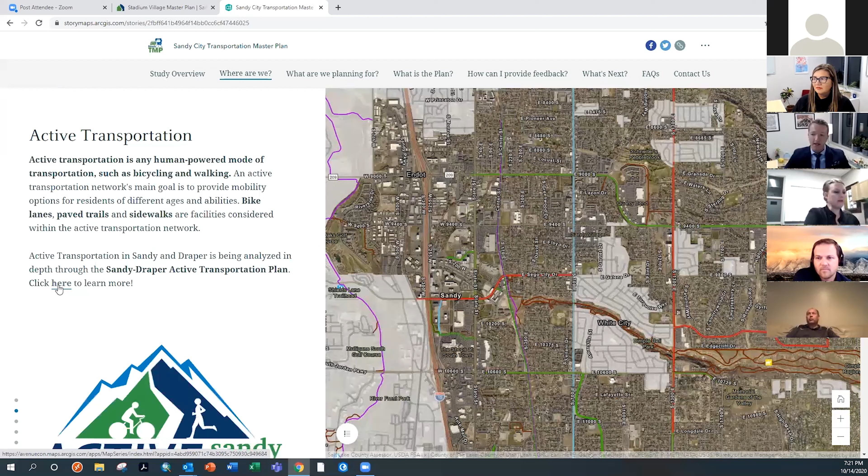Even though it's getting a deeper look, and you can find more information by clicking on this link that'll take you to the active transportation website, it certainly played a large role. Several of the projects you'll see here in a minute were active transportation projects, things like improving corridors to make sure we had bike lanes and the like.

However, there's not a great connection between the TRAX and the commuter rail, and that's something we wanted to look at. So transit and bus and train connections were something we certainly wanted to take a look at as part of the plan.

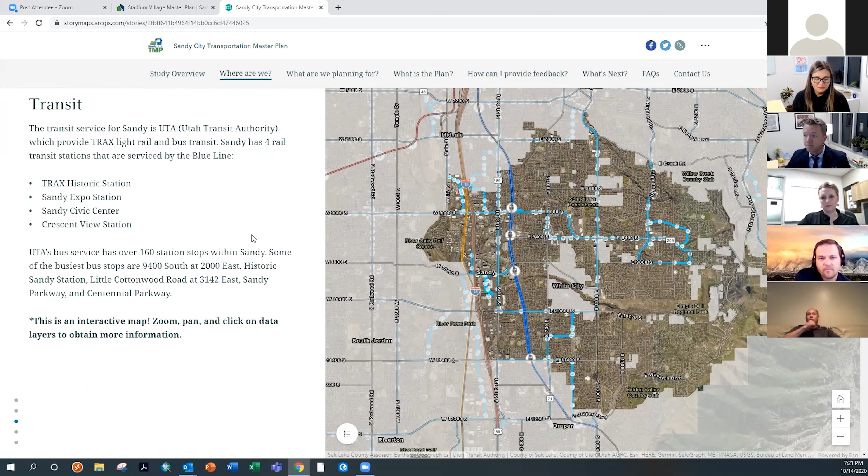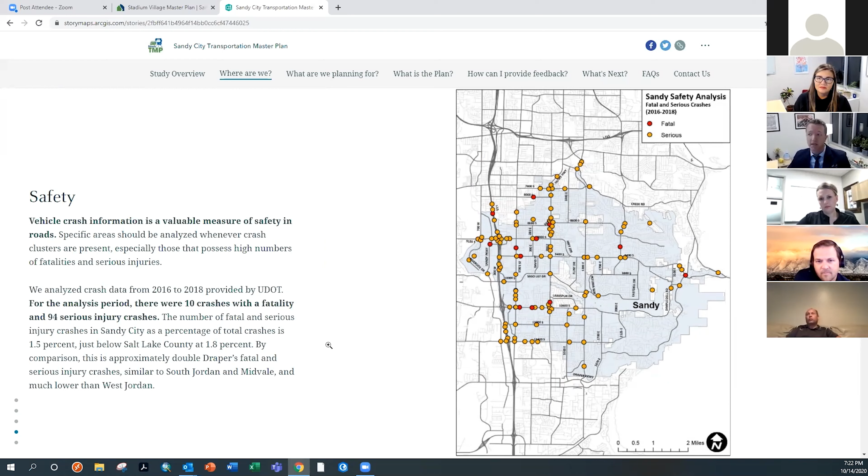The cluster of these crashes at intersections was something we paid special close attention to. You'll see in the final project list that several of these intersections, like 13th East and Creek Road, 90th and Sandy Parkway, 7th West, and 90th and Monroe, all have a cluster of crashes that we took a look at - those ones ultimately got projects on them.

However, going forward, there's going to be a lot of growth. And so a lot of the value of the master plan itself is to look at future growth and make sure that we're planning for those things, and that we can try to maintain the same level of service that we enjoy today. We're looking at Sandy City adding about 30,000, just under 30,000 more people in population over the next 30 years, and almost 30,000 jobs as well. So you can see population growth and job growth in Sandy City between now and 2050.

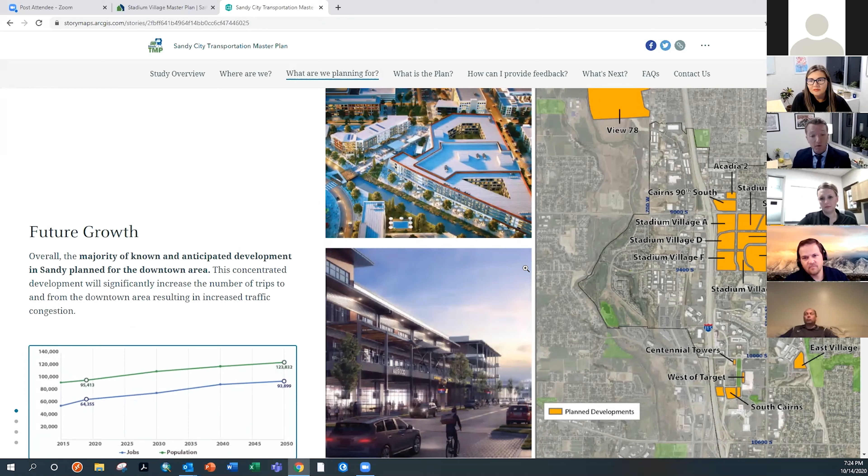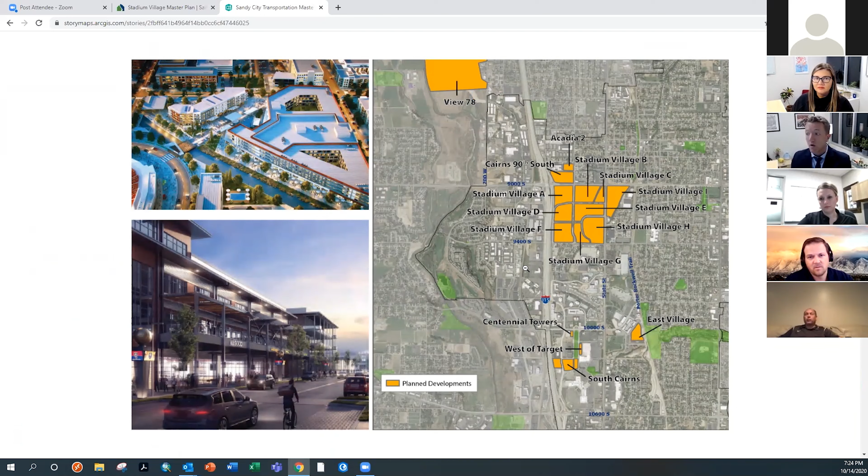A lot of this growth is in areas that have recently been doing master plans. The images here on the right are a map of the Stadium Village area, kind of around Rio Tinto Stadium and the area between the mall and 90th South. You can see a lot of different plans. The images on the left are renderings from the Stadium Village plan, where we're planning for more growth, some more density in that area. A lot of the new growth we're planning for is happening in those areas.

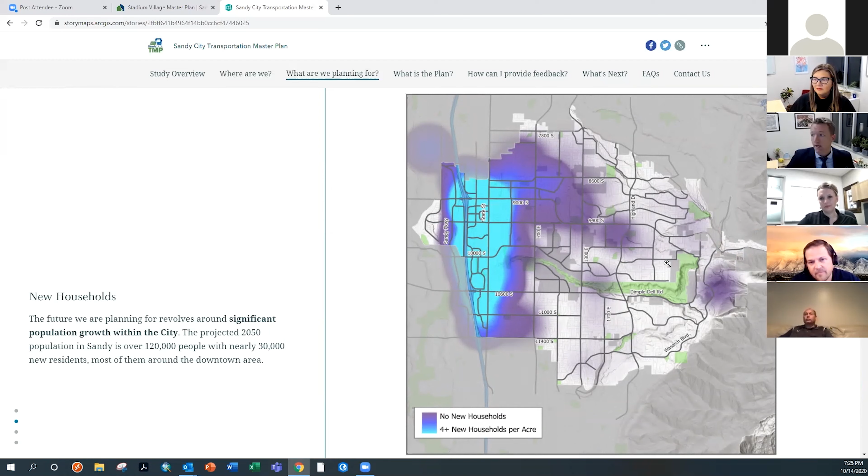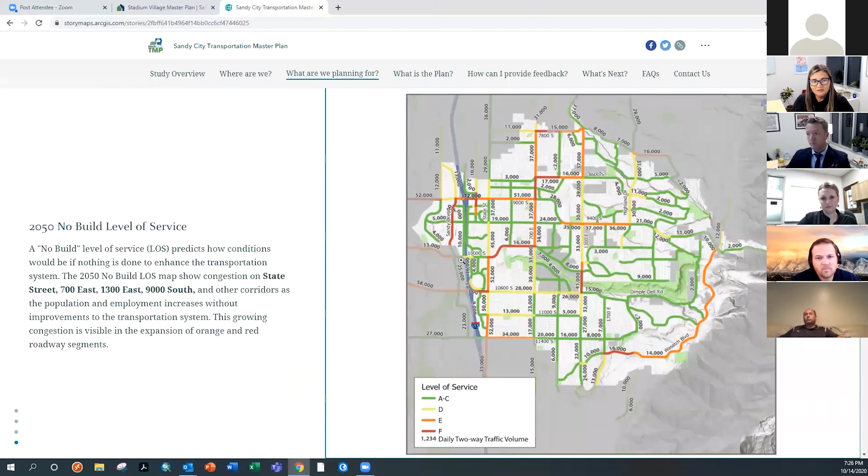But have no fear, we have a plan to have the improvements that we need to maintain the quality of life that we've enjoyed. That's where the question of what is the plan kind of comes in. So we've worked collectively with Sandy City, with Brittany, with Ryan, Dan, everybody, and the consultant team, looking at what improvements are necessary and need to be made to maintain that same level of green corridors within the city and the quality of life we've enjoyed.

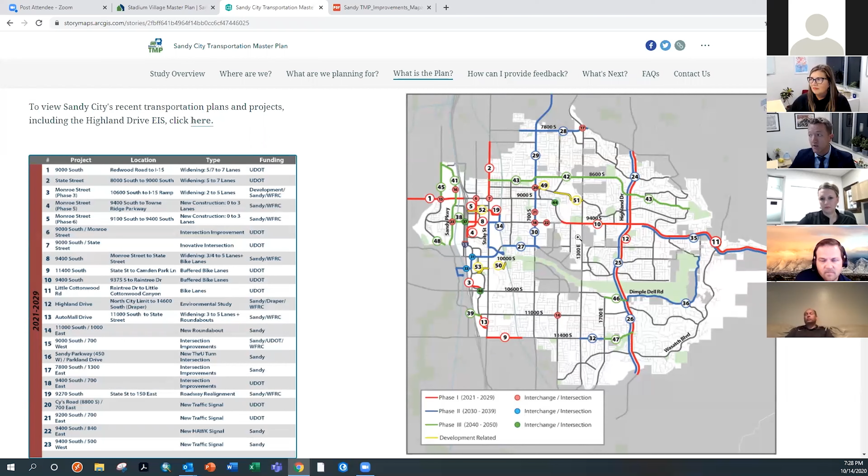And so we believe that by completing these projects or building out this project list as best we can, that Sandy City can stay ahead of the growth that's coming and maintain the quality of life that your residents have kind of always enjoyed. This plan, this map of the projects is really kind of the big takeaway. So if you asked me to show you the master plan in a single map or a single page, it would be this. And this is what we'd really like people to take a close look at and to comment on.

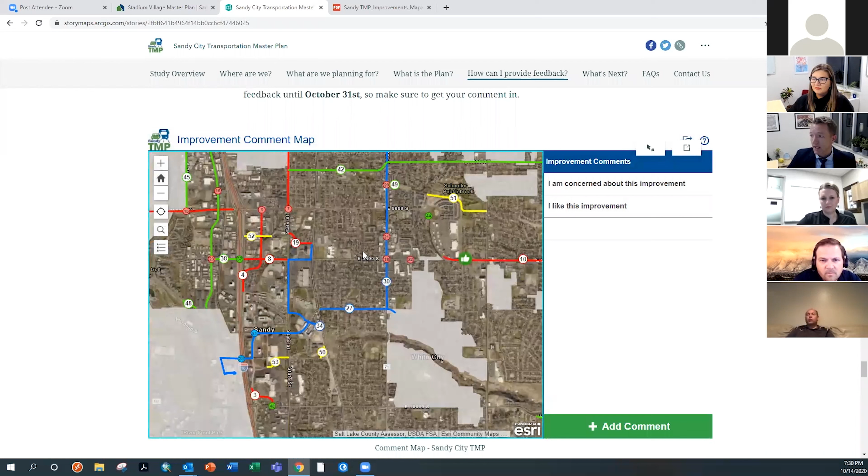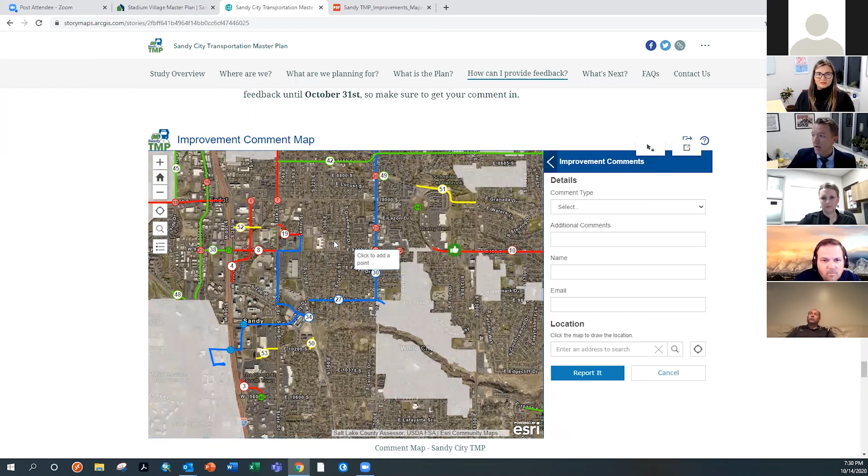And so to that end, we provided a way that you can provide feedback directly on that map. If you click on the 'how can I provide feedback,' we have an interactive map that you can comment on. There's a map description here that you can read about how to identify corridor projects, and you can zoom in and click on corridors and it'll tell you about them, like what is this project. And if you're ready to make a comment, you can just click on this green box and it'll pull up a comment box, and you can find the area you want to comment on, click on it once to drop a pin, select the comment type and add your comments appropriately.

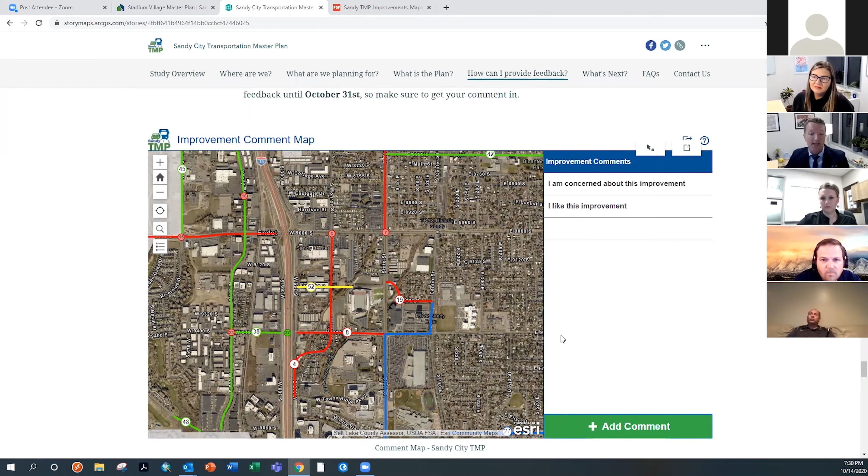The project list, ultimately, we want to reflect what the city would like to see in terms of roadway improvements. There's a handful of widenings. There's several intersections that are going to be key to take a look at. And so we want this plan to be yours. So please take the time to go to the map, to provide a comment, and to let us know what you think about the individual projects as we work towards finalizing the master plan.

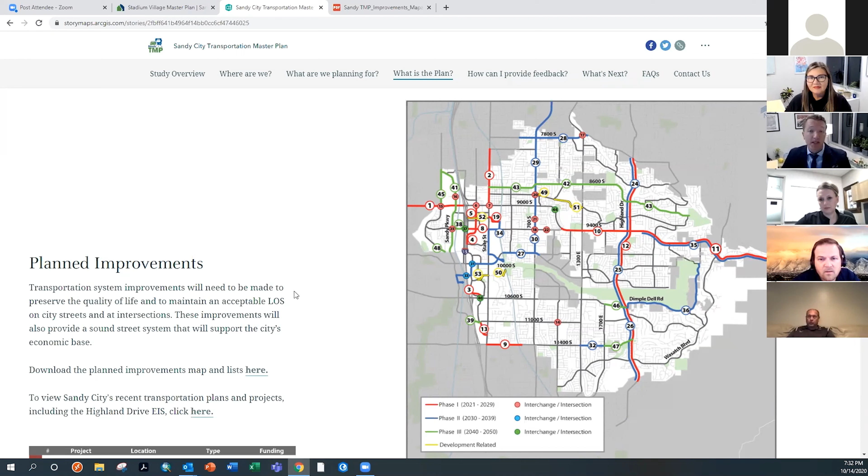The way we want to use comments is to specifically take a look at the projects. We want to know how people feel about them, and is there an opportunity for us to take a closer look at any one of these individual projects, including if people have a real concern about it. We want to understand what that concern is, and there might be an opportunity to have a project removed from the list. Ultimately, we want this to be your plan, and we want it to reflect your values, and we want it to serve Sandy City.

And we think that it does. We think that we are doing a good job to identify things that improve safety, make it safer for your community to navigate around, that accommodates all modes. We've got bike projects and transit projects on here, that it reduces congestion as well. But if we aren't accomplishing those things, or you have a real problem with one of those projects, let us know, and yeah, there could be an opportunity to have it removed.

I would add on to that too, Thomas, that if there's a lot of negative feedback about a project, it would be a definite signal to us that we need to look at the project from a different perspective. Are there some particular concerns about the project that we need to review? Is there something that we're not seeing or something that we're missing? Is there some adjustments that are needed with the project? So maybe the project's still needed, but maybe we need to take a little bit different approach to it.

Or if there was a project that was more positive, could it possibly move ahead in any of the phasing? Sure, yeah. If people really, really want to see a project done early, if there was a lot of passion behind getting a project done, then there's probably some value in taking a look at the timing.

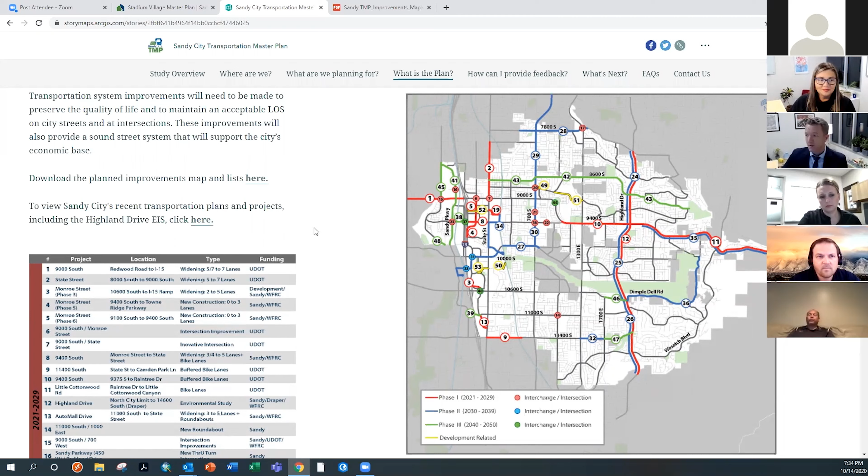Brittany talked about doing the active transportation plan and overlapping with the master plan. We've got today's public meeting, but going into the future, late this year or early next year, the plan is to have this document presented to Planning Commission and have their review and recommendation, and then ultimately to City Council, and then eventually adopted with the regional transportation plan, so that Wasatch Front, which controls all the transportation plans in the region, can add it to their RTP.

And each of those meetings are public forums, so people have the opportunity to attend Planning Commission and City Council and voice their concerns there if they feel like they need to or want to see how this particular document is advancing this plan.

But even beyond then, the project list goes to Brittany and Ryan and the city, and they get an opportunity to start taking a look at them from a capital improvements perspective and start to fund and see how things go. Several of these corridors will need further study. So even beyond into next year and beyond, there's opportunities to still follow projects.

Okay, there's been some chatter recently around the Highland Drive extension project. What is the plan for that? Brittany, do you want to talk about Highland Drive? Yeah, I'll hit on that.

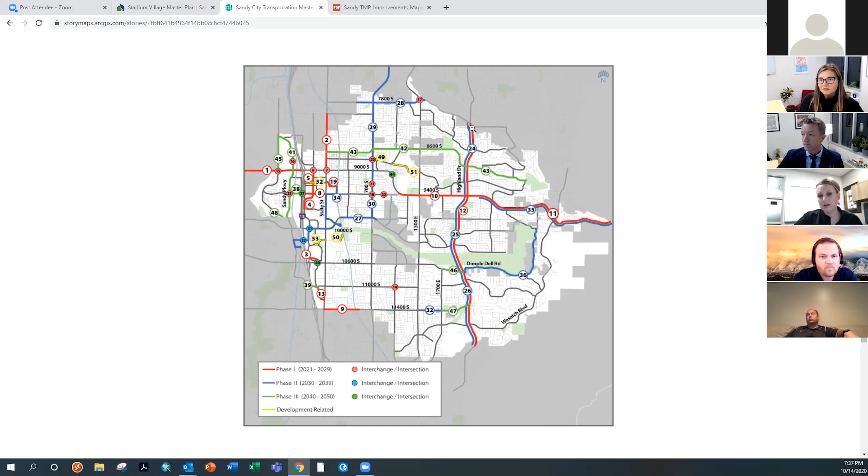So there's two major things that we as a city are looking for from this study. Number one, is the Highland Drive corridor needed or is it not needed? And number two, if it is needed, how are we supposed to get through Dimple Dell Park and how are we supposed to get through the Hidden Valley Golf Course?

We anticipate if it's not needed, we will still have construction there, particularly between Sego Lily and 9800 South, likely a 2-lane corridor with an adjacent trail.

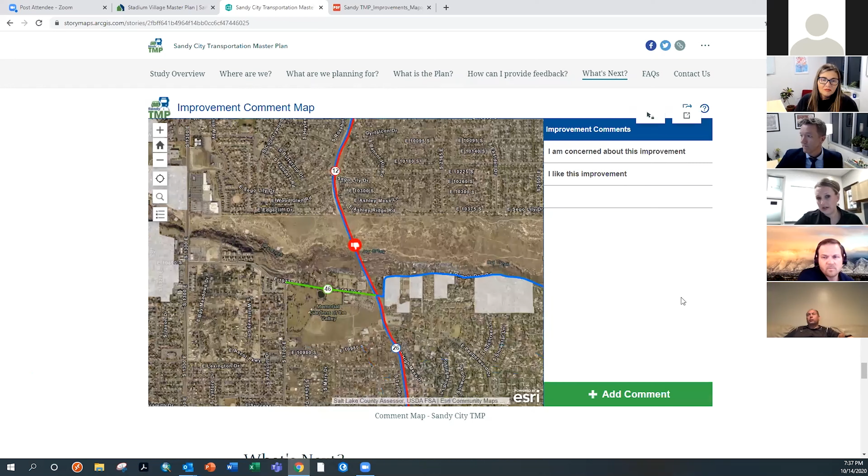And if it is needed, then it would be done likely in phases because it's quite a large project. But the soonest that any construction would happen would be at the year 2030 or later.

And that's because the whole study is pretty big, $4.3 million is a lot. So we anticipate that study to take about a year or two.

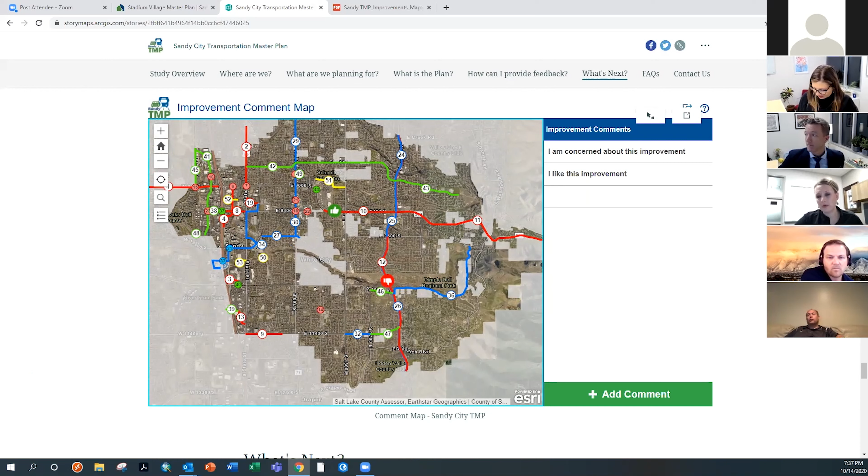And then it'll take some time for coordination between us and Draper on how we want to move forward with those project recommendations. And then from that, the federal funding cycles, which are the projects that require a lot of funding, that funding comes from the federal government, and we have to apply for those projects 5 years in advance.

And so we applied to get the funding for this study back in 2016. And so we would have to, after our coordination with Draper and our plans to move forward, we would then...

have to apply for that federal funding at 2025 at the soonest. So if whatever project we decide to apply for gets funded, the soonest it would happen is in year 2030.

But the big takeaway from everything I'm saying is what the study is going to do for us. One, it'll tell us, is a Highland Drive corridor needed or is it not needed? And then if it is needed, how do we get through the Dimple Dell and through Hidden Valley?

If I can, just to kind of clarify maybe the map a little bit for people who might be viewing it, you'll notice there's multiple numbers on Highland Drive, and that's because there's different phases. And Brittany just talked about that environmental study, and that is what's shown for Project 12 here. It's Highland Drive, it's the environmental study, it's the red line.

So in that first phase that Brittany just talked about, those first couple of years, it's just doing the environmental study. And then beyond that, going into the future, depending on what that study has as outcomes, you can see we've got 24, 25, and 26 are all Highland Drive. And the reason that we're listing it 3 times is because they have different limits.

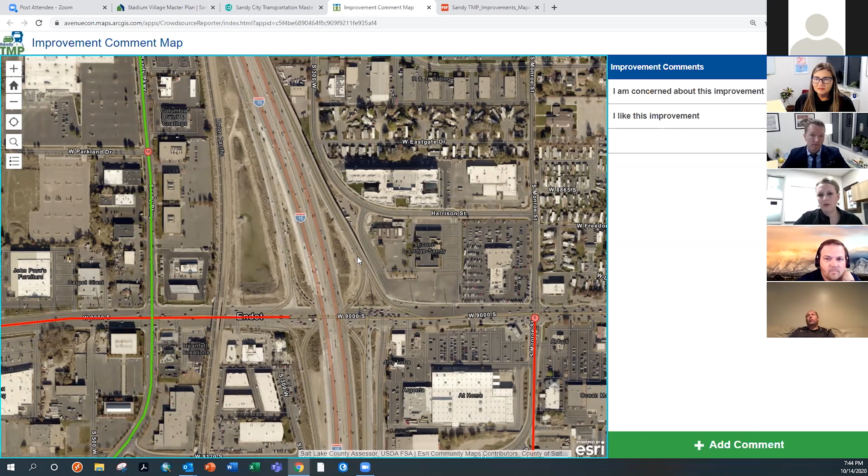As far as the northbound on-ramp goes, that is a pinch point in the area, and that interchange, as far as I understand it, is the busiest interchange in the whole state. So that northbound on-ramp does cause some backup to these side streets that approach the freeway. While this new flyover and new ramp UDOT's doing right now will not add any capacity to that ramp metering area, it'll be a new change, and new traffic patterns will develop through here because of that project.

And so that will continue to be studied over the next few years. Accommodations should be made in phase 2 of the I-15 northbound collector distributor project.

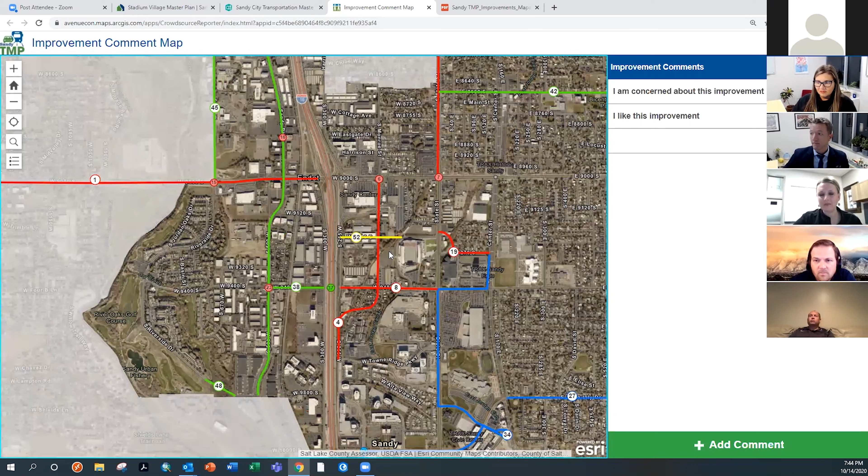Another project that we're doing right now, we actually just barely bid this out, so construction's just getting started, is at the Monroe and 90th South intersection. We intend to add dual left turn lanes on every single leg of this intersection, and then also a project on the south end, a little bit on the south leg down there.

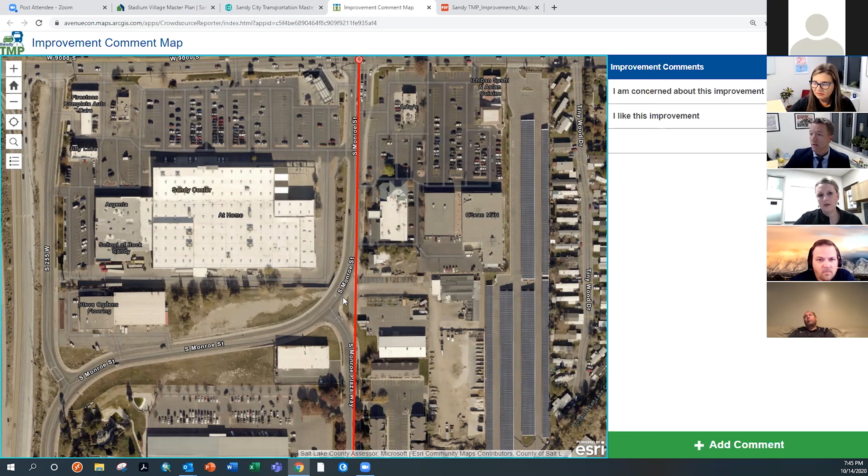Yep, on where Monroe Street and Monroe Parkway connect. But the main thing is adding capacity to the Monroe and 90th South intersection with dual left turn lanes in all directions. That also means you have 2 receiving lanes on all legs as well. So it should help that northbound traffic, especially on Monroe, clear out a little bit faster and not have so much backup through that area.

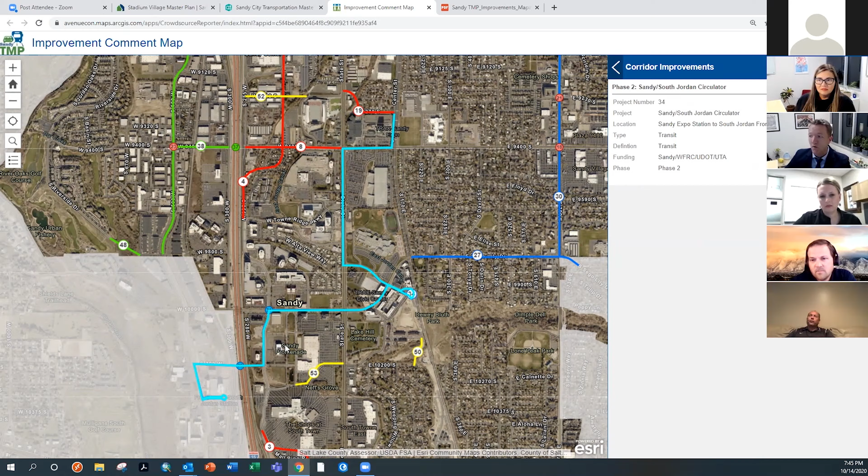Yeah, that's great, that's all I have. Well, the only other one we might mention is there's also a transit project in the future, from downtown, along this corridor, designed to specifically connect the light rail and commuter rail stations through the downtown core. There's also a new flyover across I-15 to accommodate transit as well as bicycles and pedestrians, so we're addressing all modes in downtown.

So not much going on at all, right, Thomas? That's right. Yeah, that's a lot.

The last question we have is, how did you figure out which phase each project went into? That's again a really great question. A lot of what went into the phasing is we look specifically at all of this travel demand modeling. Brittany, when she introduced the study tonight, mentioned the signal timing that led to this travel demand modeling. We did detailed models for the city in 2030, 2040, and 2050 to look at whether there are triggers for when projects are needed, and whether a project would need to be in phase 1, phase 2, or phase 3. We also tried to look at how it aligned with other projects in the region, with Wasatch Front's plans, and then finally with funding allocation. We can't put everything in the first 10 years, we couldn't afford it, so when dollars might become available also led us to look at the best phasing and timing for some of these projects.

In some cases, there are one or two projects that lead to another, so step one comes before step two, like Brittany was describing with that intersection in Monroe, where we'll make an improvement, and then as they build some of the downtown and Stadium Village plan projects, there will be another improvement at that time. Sometimes, referring back to the earlier question, projects can change years or when they're needed, and they can bump up to be earlier. A lot of that depends on what the development looks like in the area: how hard it is to obtain the needed right-of-way, what kind of utilities are there, and what the traffic pattern changes or demands look like.

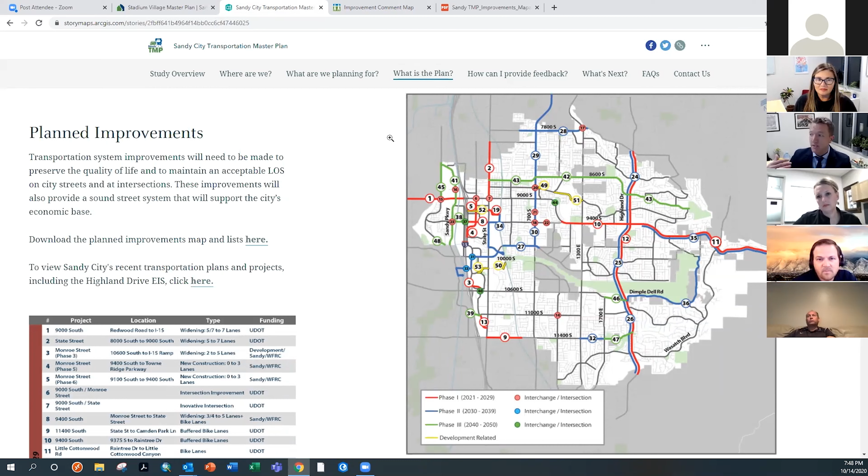If there are no more questions, I'd like to thank the city for leading this project and all the effort that went into putting the draft plan together. There's a full document, not just the project map and list, although that is the bulk of it. I'd encourage folks to visit the website in the coming weeks and months and get familiar with what the plan is for your city. I'd really encourage you to talk to your friends and neighbors about commenting on our map and letting us know your thoughts on individual projects, whether you like them or not, or any thoughts there. The website's got tons of other great information, we've got an FAQ about what a transportation plan is and some of its benefits. You can always reach out to Sandy City via a couple different ways detailed here, like getting email notifications, as well as reach out to us on the project team at Avenue by calling this number or email. We'd really love to hear from you and talk to folks about this plan and the projects in Sandy.